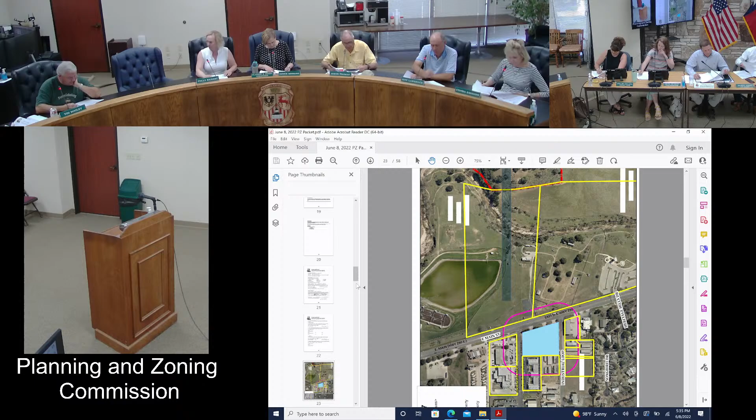That was a tough one, Tim. No. Sam, all right. Jeffrey, I keep getting the Morans wrong. Mr. Moran. I'll just start saying Mr. Moran.

All right, let's go to the next item, 5C, Site Plan 2206. Consider a site plan for a short-term rental facility located at 639 Post Oak Street.

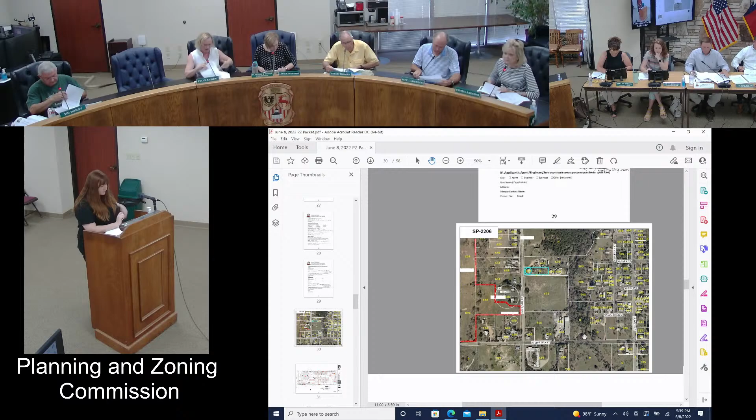And the pool is on the side facing the R2 property, correct? It is. It will be screened, though, with a wall to meet code, with fencing and borders around it.

That's what I was going to ask, what kind of screening are you going to have for all of it? Well, we will certainly provide fencing along the north, east, and south walls. I think that material has yet to be determined, but we will have screening.

So as part of the screening requirement, it requires a minimum of 6 feet in height, and requires either wood or masonry fence. In addition, they could add any type of hedge-like material to go along with that screening requirement.

I would strongly prefer a masonry fence near the pool to deflect any noise away from the R2 side, from the neighbors, and I'd probably suggest 8 feet instead of 6 feet, because you're going to have lighting in the pool, so there's potential light pollution spilling over into the R2 property. My thought is that where the pool section is, between the front building and the start of those STRs on that side, would be sufficient to deflect both noise and light.

Anyone else have comments, questions?

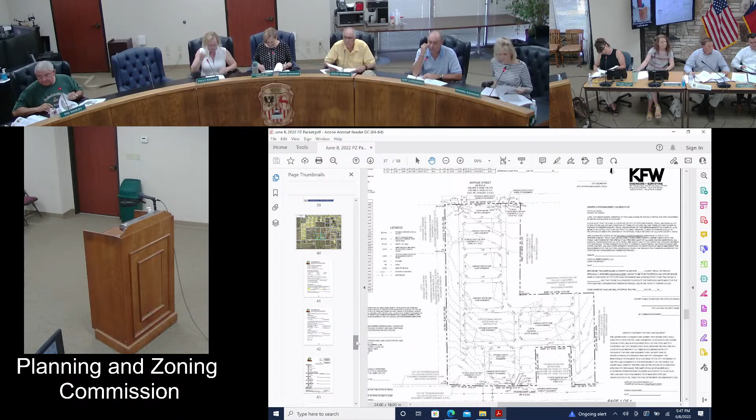All right, let's go to item number 5E, P 2219, preliminary plat of Harmony Hills, a 21-acre subdivision located at 668 Pico Road.

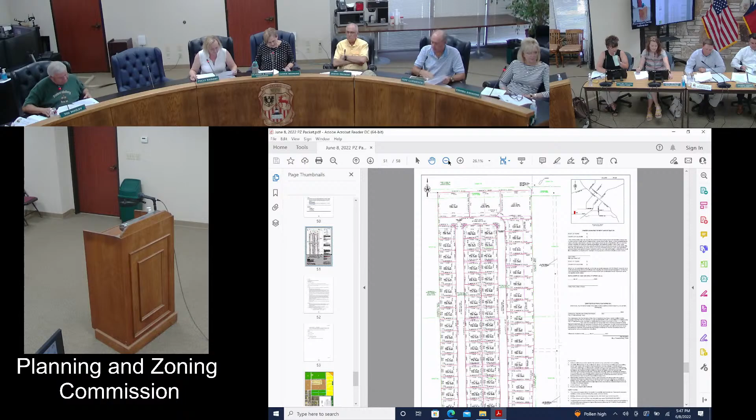You're up, Mr. Cornell. And you're making all kinds of money tonight, aren't you? I was hoping Shelby would give this presentation. He's much better at these than I am.

This is a 21 acre subdivision. These will be R1 lots we annexed into the city this last year, and some of these are about 8,050 plus square feet, so some of them are larger. It accesses entirely off of Pico. One of the comments in the staff report, which they pointed out to me, is that the roads are a little bit longer than the guidance of maximum block length. That had changed - we had one single entrance on the right, which actually reduced the overall block length, but whenever we added another entrance for fire protection, it extended the length. So now we're approaching 1360, I believe, I don't remember the actual number, and I think the guidance is 1200. So we would really like to keep that, allow it to still occur. Everything else is going to be relatively standard R1 zoning. I do have a representative, one of the owners is here, Clint Pond.

All right, thank you. Shelby? Yes, ma'am. Thank you, and thank you, Mark. You did a fabulous job.

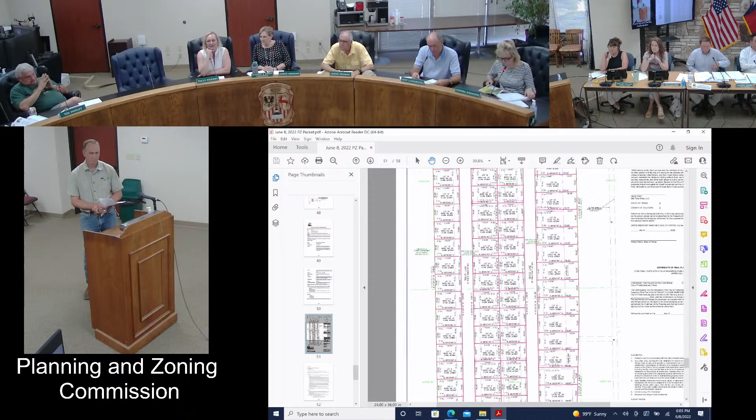All right, I'll just leave it as a comment to staff that as you're working through this, figure out with them how we keep those streets from being 45-mile-an-hour speed zones through a neighborhood. That's because that's what they're going to do. I mean, those are 40-foot wide streets, right? Yes. So people are going to drive 45 on this.

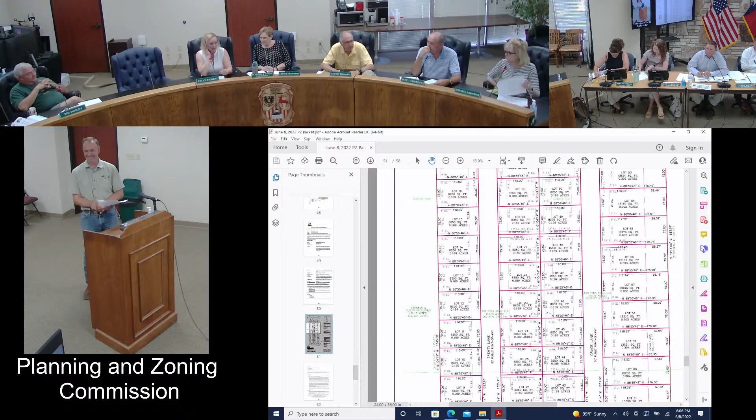We can shrink it to 30. I'm going to make him throw up over there by saying that, but your impact study should tell you that narrower streets tend to make cars go slower because they can't see what's going on, so they slow down, but wider streets make them go fast. Maybe that's something we look at, possibly with sidewalks, or at least look at the street design to see how you can push drivers to slow down instead of ending up with those hump things trying to fix it later. Understood, those hump things, yeah.

All right, okay, let me, I've said my piece. Let me ask another question.

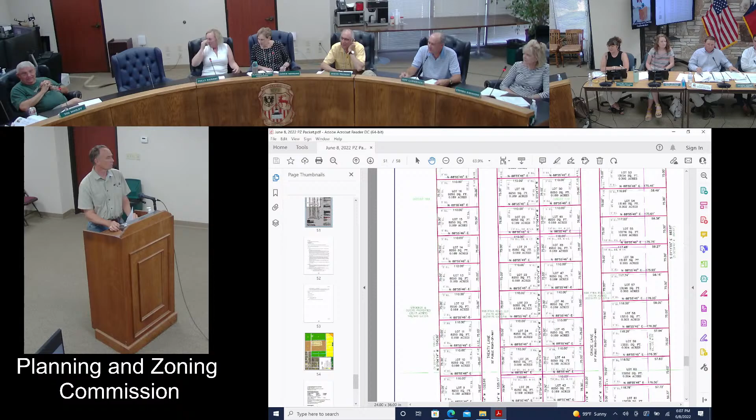Are you or anybody associated with the adjacent property owner? No, meaning left and right and north and south? Well, what I'm saying is, you've got one corporation over here that owns this project, and you happen to own an interest in the other property with another corporation. No, you're talking about flipping things. I mean, has anyone been trying to develop it all under two different umbrellas or something like that? No, okay, that's Steve Olford's on that site. Okay, enough said.

All right, I move we approve it as presented with Polly's recommendation to staff. Motion by Tim, do I have a second? I'll second that. Second by Steve. Any other discussion? All in favor, aye. Aye. All opposed? All right, motion carries. Thank you, thank you, Mo.

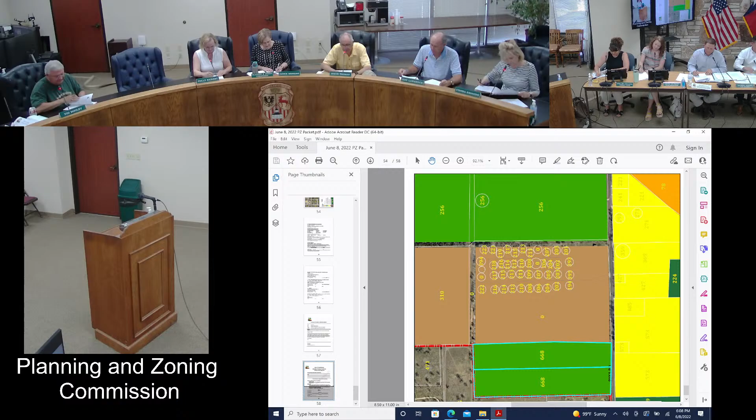All right, let's go to the minutes first before we go to the next item, get that out of the way. So let's go to item number 3, approval of the meeting minutes. Let's go to 3A, the May 4th regular planning and zoning meeting. Everybody had a chance to read that. Anybody have any corrections or additions, or anybody ready to approve?

I move we approve the May 4th. I have a motion by Polly, do I have a second? Second, second by Jeff. Any discussion? All in favor, aye. Aye. All opposed? All right, carried.

Let's go to item number 3B, the March 2nd special planning and zoning commission meeting. I have two edits. One on page 10, under item 4, action item A, section 2.1 definitions. Under the motion, it says modify the definition short-term rental B&B on page 17 to read short-term rental primary. It should be residence, not resident.

And then on page 13, section 7.340, special rear yard regulations, we have 6 voted for and 2 absent, but in the context of this section, the absences weren't there at that point. We were all there and we were all voting. So when we did front yard, side yard, rear yard, we were all on the dais, so that can't be correct.